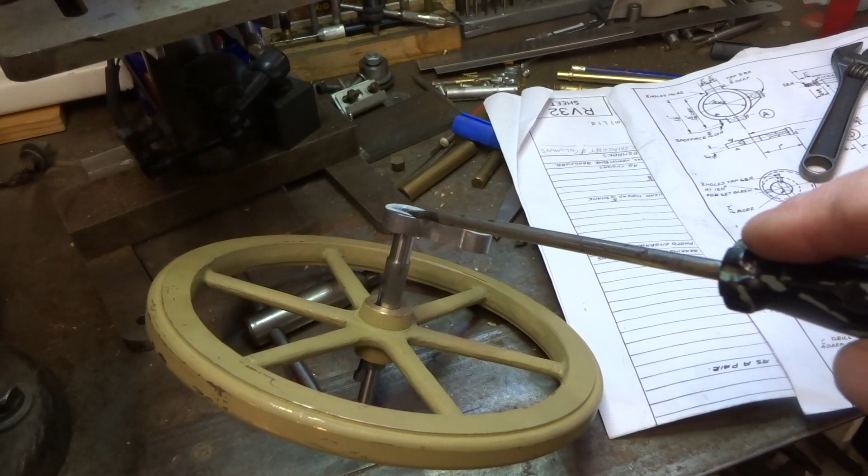The drawing calls for this part of this crank arm on the main crankshaft to be thinner than the area in the boss. Several ways you could have done it. I could have made the bore at this end larger and then fitted an insert in to create that effect, and actually made this out of thinner metal, but I didn't do that. So the task I'm now faced with is to reduce the thickness of this end to something like what the drawing calls for.

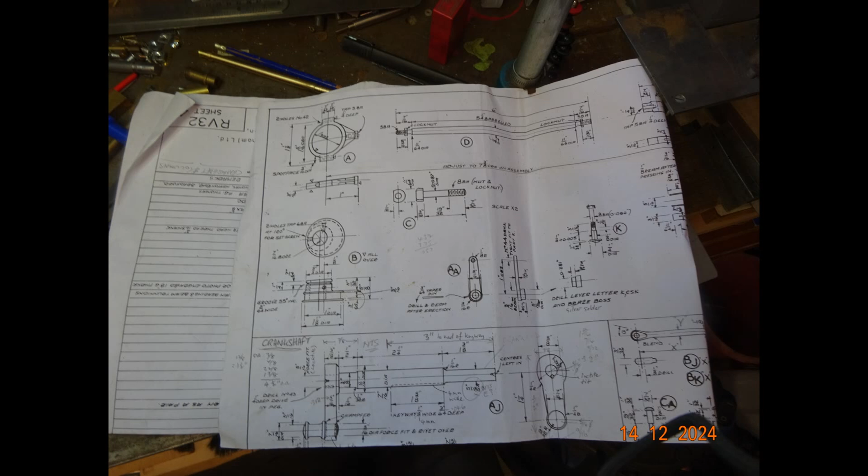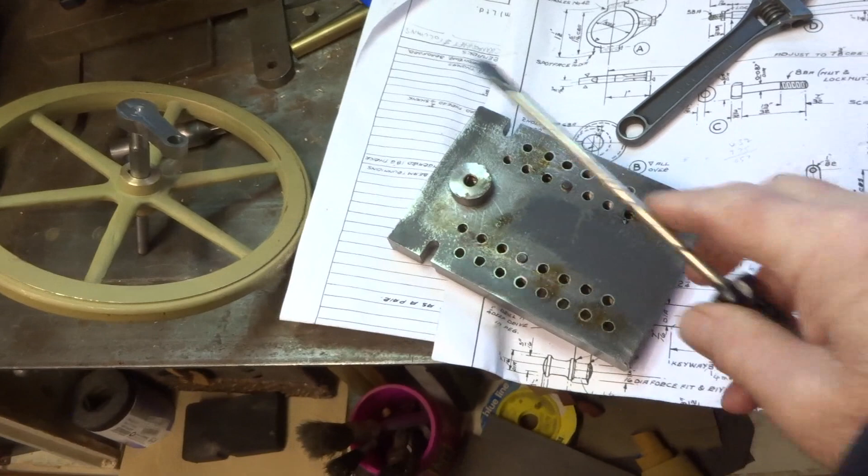Years ago I made this, I suppose a fixture plate or something, which fits on the rotary table in the middle. There's the boss, and what you do, if you can get it set up, is to centre whatever you're working on in the middle here, clamp it down by whatever means, and then you can rotate it on the rotary table to machine whatever it is you think you're doing.

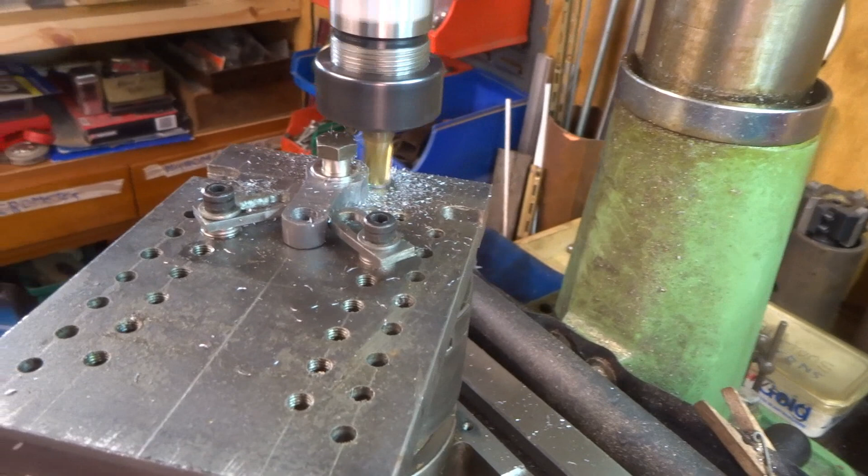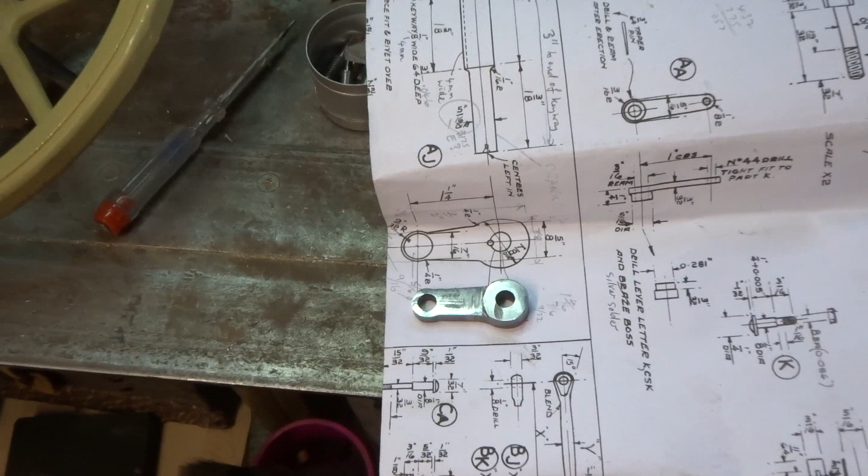Slightly speeded up piece of video showing this rotary table machining the end of the crank arm to make it look more round. My filing skills are not great. Nowhere near medal winning, but it'll have to do. I've got fed up trying to machine this, so as far as I'm concerned, that's it.

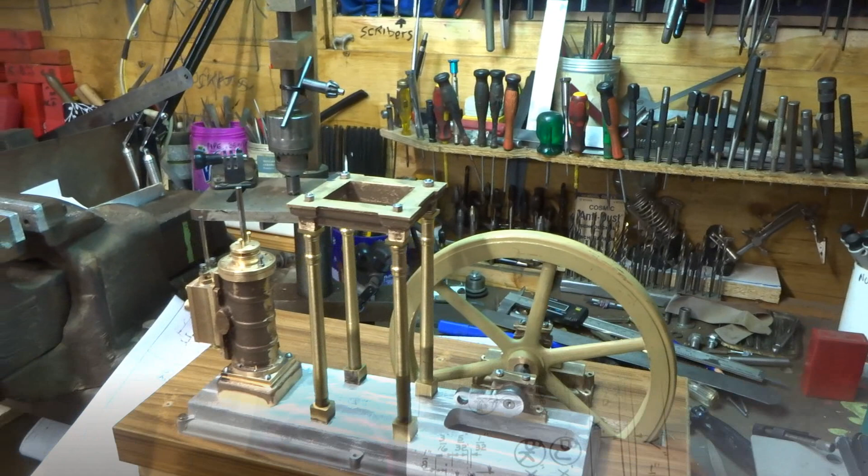Just a mock-up. I've machined the two bearings, and I'm pleased to say things seem to turn around okay. I haven't bolted the bearings down yet because I'm not too sure exactly where they're going to go. Probably the next thing is to do the beam and make the connecting rod or whatever it's called before I settle on precisely where I'm going to drill that lot down. But yeah, I'm happy with that. Very good.

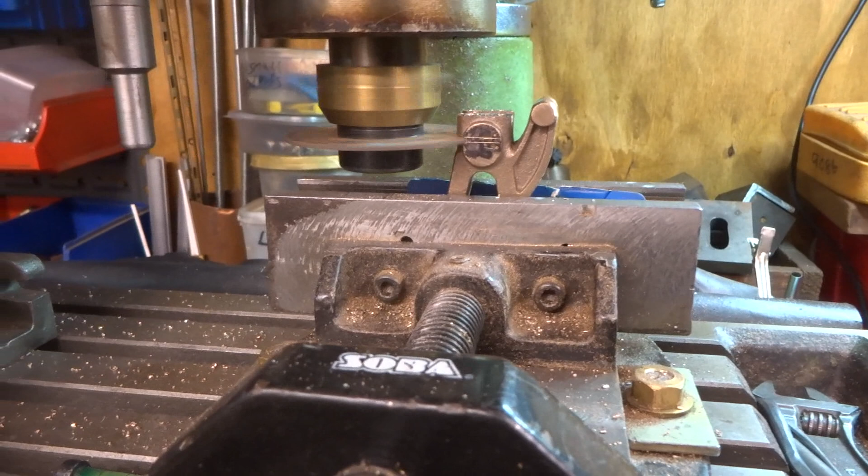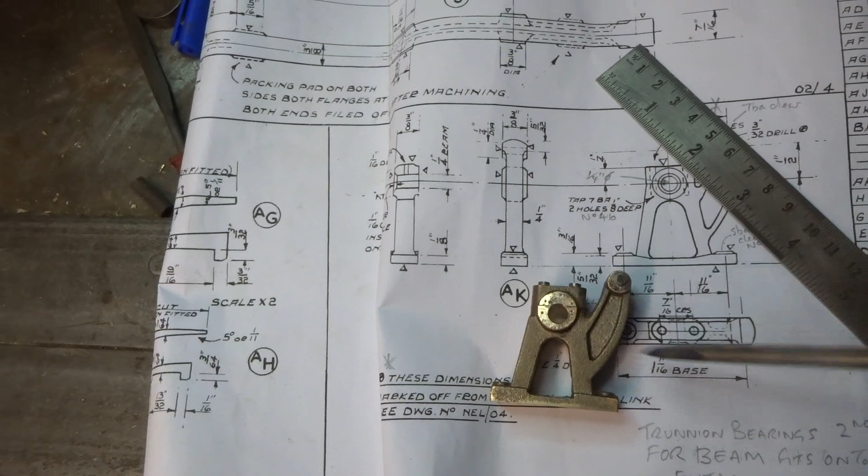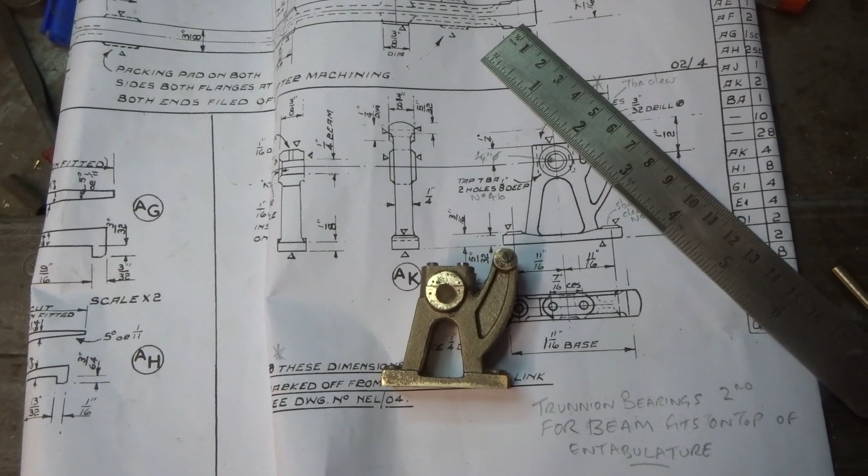This is the start of a ginormous mistake. This, I think, is the trunnion bearing in which the beam of this beam engine kind of rocks. And I have made a colossal mistake. I was tempted not to own up, say nothing, either scrap the part or I don't know, but my conscience has overcome me and I'm going to own up to what I've done wrong.

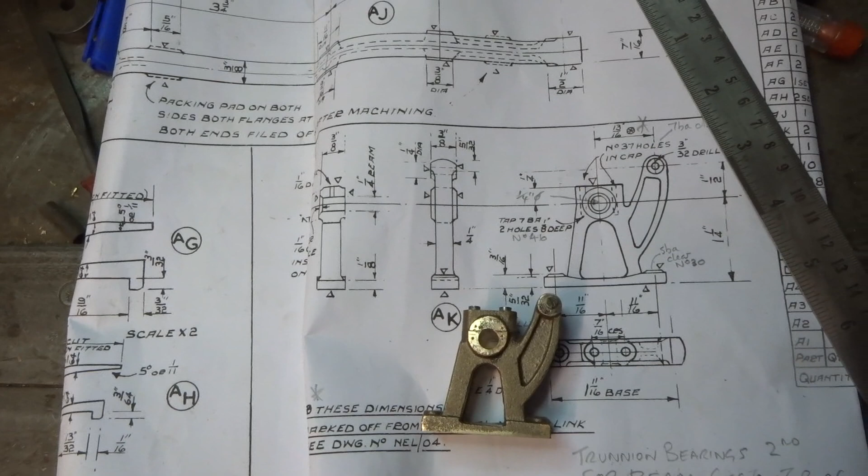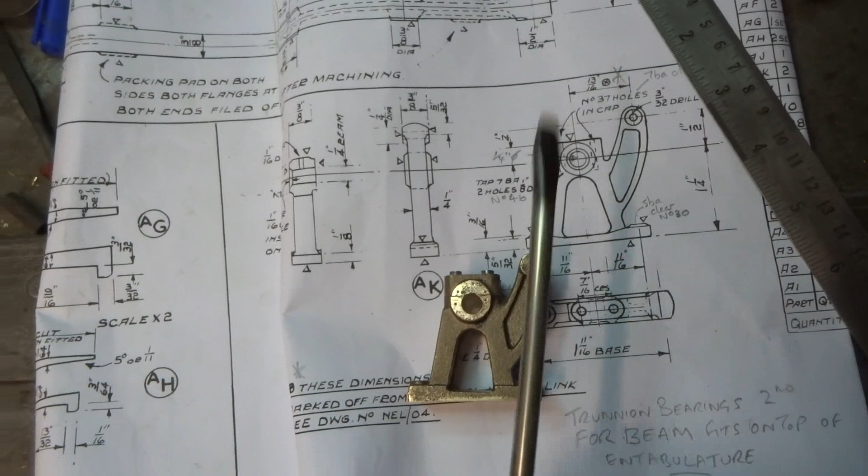This hole is in the wrong place, this bearing is in the wrong place. The distance between this pivot point here and the centre of the pivot for the rocking beam is supposed to be, by this drawing, 1/2 inch. But actually, I don't know how it's happened, it's more like 9/16 of an inch. So if I were to unscrew this, the cut line isn't on the centre of this bearing and you would never fit the shaft. So in essence, this hole needs to move in that direction, use the finger, by approximately 1/16 of an inch, dimension to be checked.

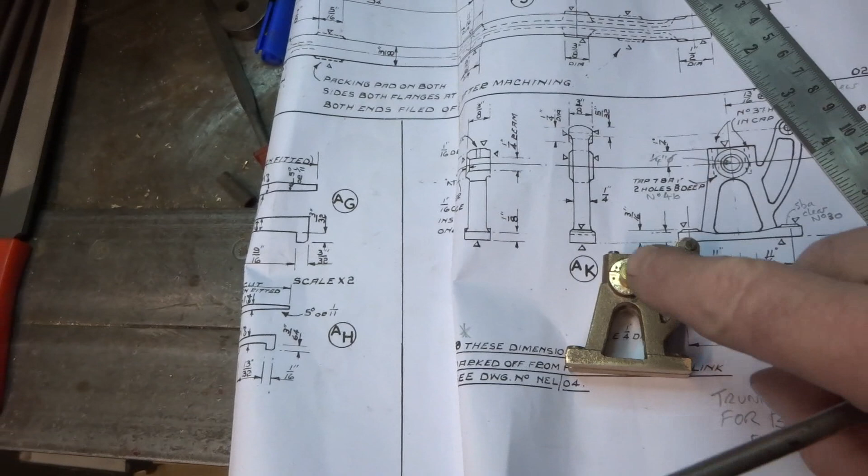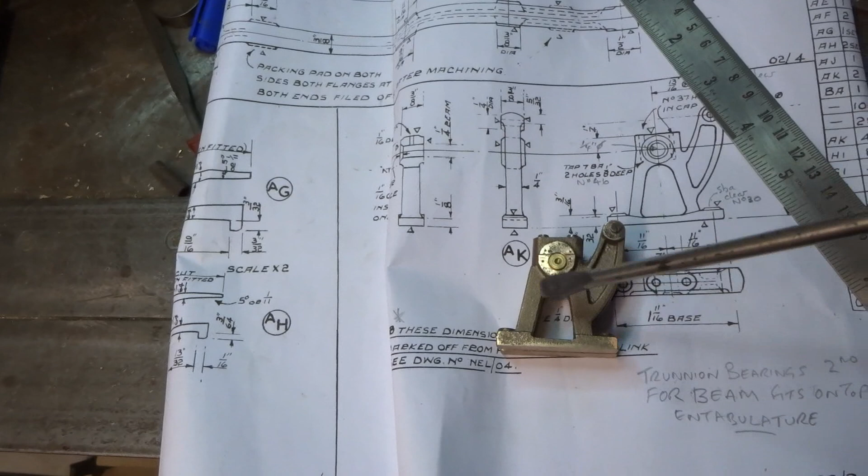I've turned a piece of brass to a fairly reasonable sliding fit in the incorrectly positioned hole, and the plan, if it is a plan, is to tin that piece of brass, solder it into this part, and then re-drill, re-ream this hole in the correct position, which, as I said, is going to be about 1/16 of an inch or so in that direction, to be checked. This is what I'm on about. It's supposed to be 1/2 inch from there to the centre line of that pivot, and isn't.

So I spent a few minutes wondering where in the new workshop I've put all my solder, and surprise, surprise, it's staggering really. It's in a cupboard that says soldering. Blooming heck.

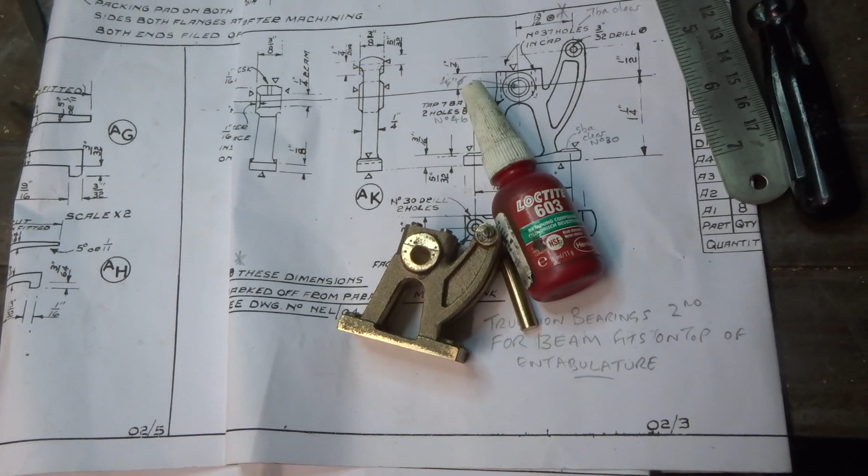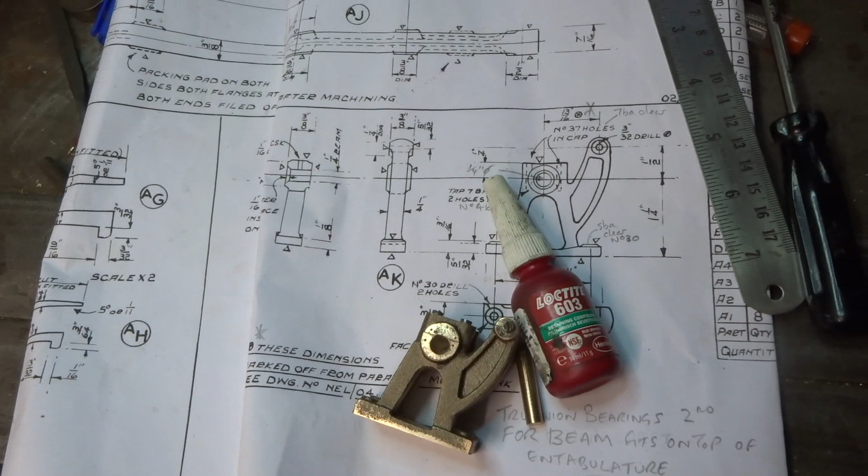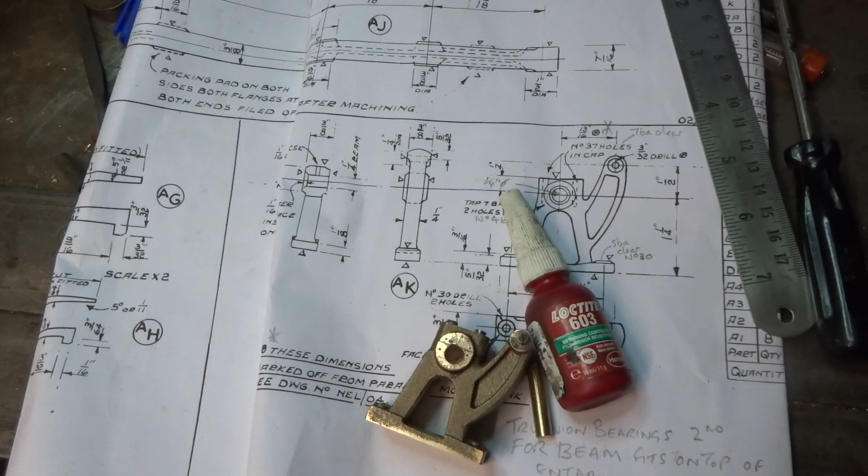Now I've had a further thought, and I can't tell whether it's a good thought or a bad thought, but soft solder is not the strongest material on the planet. The piece of brass which I intend to plug this hole with has been turned down so that it's a fairly reasonable sliding fit, i.e. it's got a little bit of clearance for what I thought was going to be solder, but I'm wondering whether to use Loctite retaining compound to fit this into that. I mean, this parting surface is not going to get hot, so there's no fear of overheating the Loctite, I don't think.

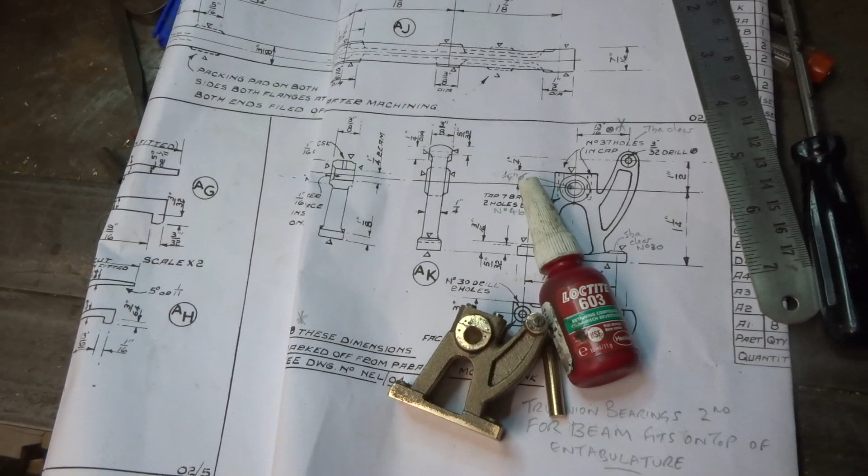And I suppose the reality is, if I use the Loctite, it avoids heating this whole assembly up, which I didn't really want to do. And if it doesn't work, I still have the option of either scrapping the lot or cleaning it up and reverting to the original soldering plan. So I'm going to try the Loctite approach.

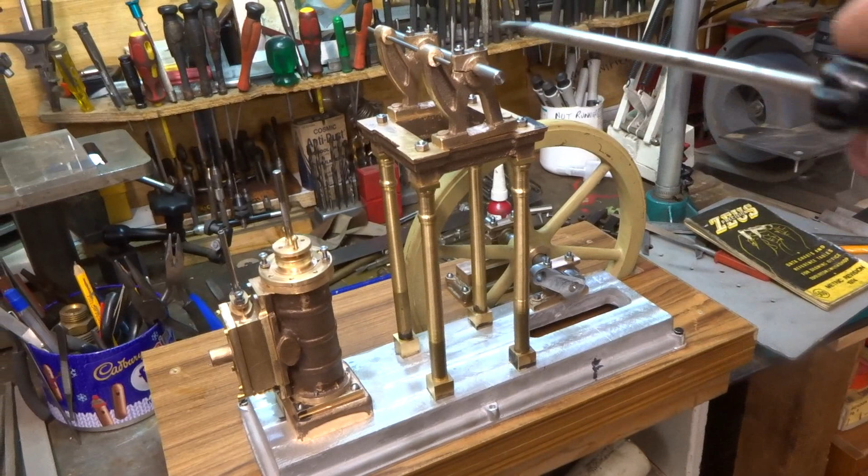Right, I've corrected the drillings through these two trunnion bearings as described, and the Loctite idea worked, I'm pleased to say, so I didn't have to do any heating up and soldering. That seems to have worked quite well. And this is another mock-up with, I think, the beam trunnion, and I think this bit's something to do with valve gear. I'm not quite sure, I haven't looked at the drawing yet. Anyway, everything's just placed there, nothing much bolted down, and it all seems to work.

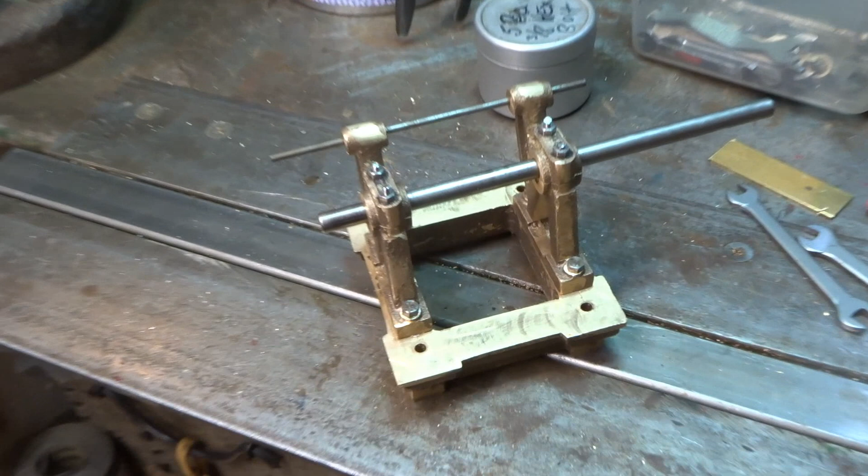Philosophically speaking, I suppose the message is that when you make a mess like I did with these drillings, instead of just throwing the part away, which is very tempting, the challenge is how you overcome the problem that you've created, and it's really all about that. Happens to me in the workshop all the time. Never mind.

The trunnion bearings are fixed to the entablature, and by eye really, but as best I can judge, everything is parallel to everything that it ought to be, hopefully. So everything, once it's on the beam engine, should be a-okay, I hope. Time will tell.

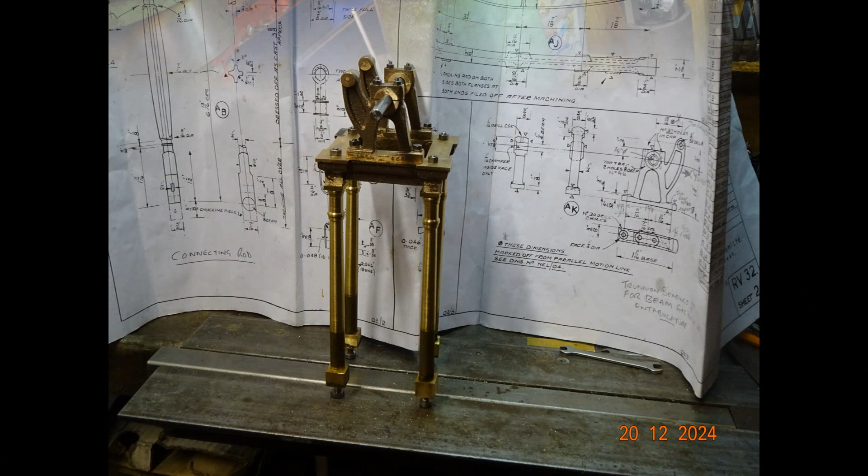The beam and its pivot are done, and seems to look correct. I have to make oilers for the various bearings, but there's a few of those around this engine, including down here, so I'll make some oil cups when I'm in a good mood, because they take quite a long time. But anyway, yeah, seems alright as far as I can judge.

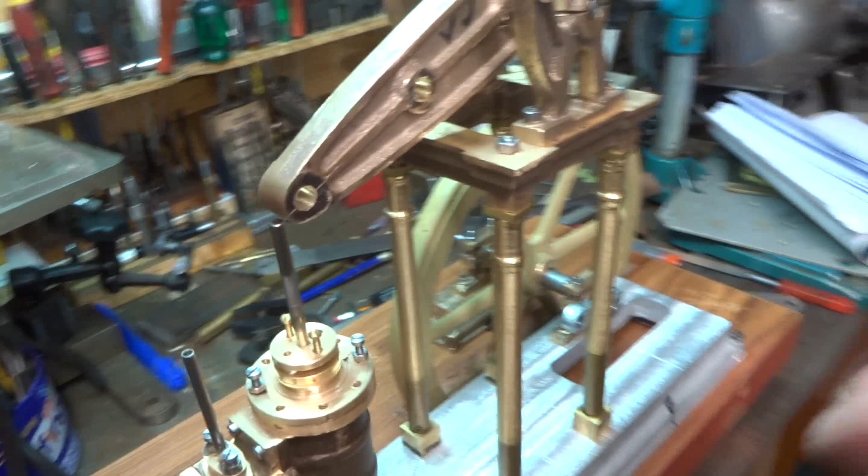And it sort of lines up at the end to where the piston's going to be, which will connect to all the valve linkage, of course, the parallel motion gear. But we're kind of there. So yeah, at this juncture I'm relatively happy, I suppose.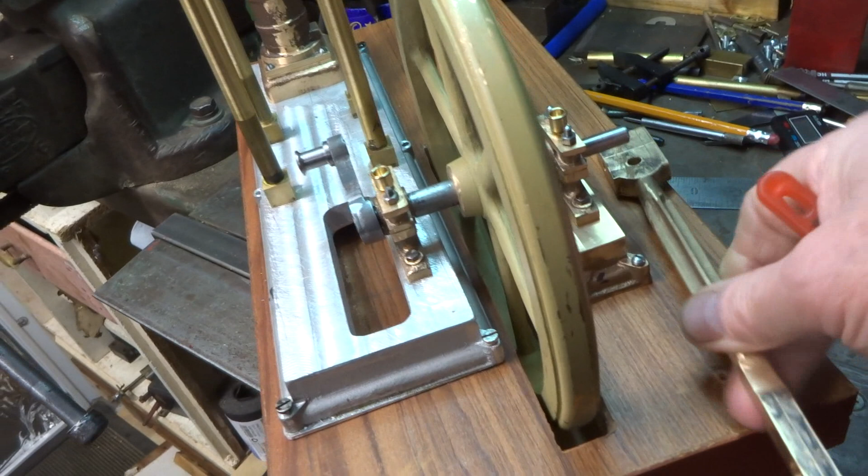I've made some oil cups for some of the bearings, and the next job is to try and make the connecting rod, or whatever it's called. I've drilled, hopefully in the right place, who knows, some of the primary holes that seem to be on the drawing, and I guess the next step is to sort of form the profiles. I'll have to take a look at the drawing.

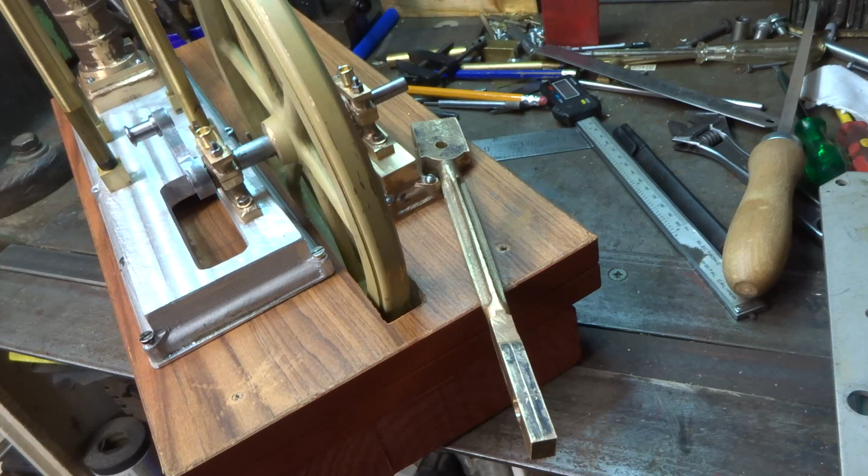The drawing calls for a bit of cosmetic turning at each end of the connecting rod. Not the sort of thing I like doing, and quite a faff to do, but I suppose I'd better have a go.

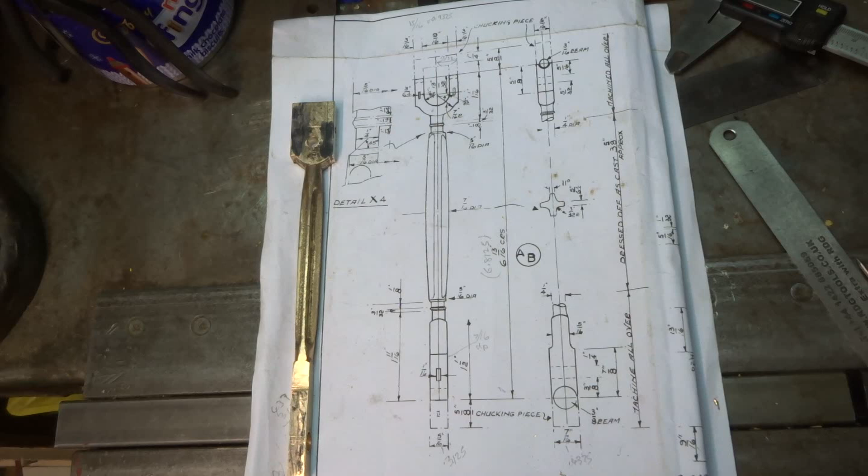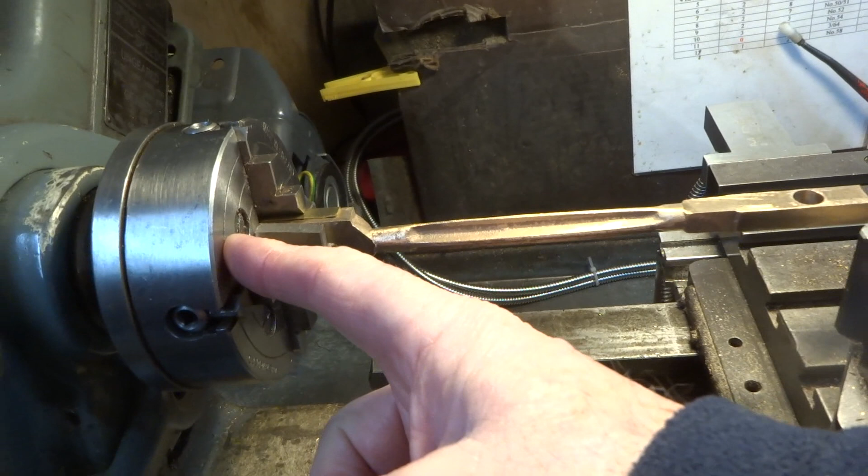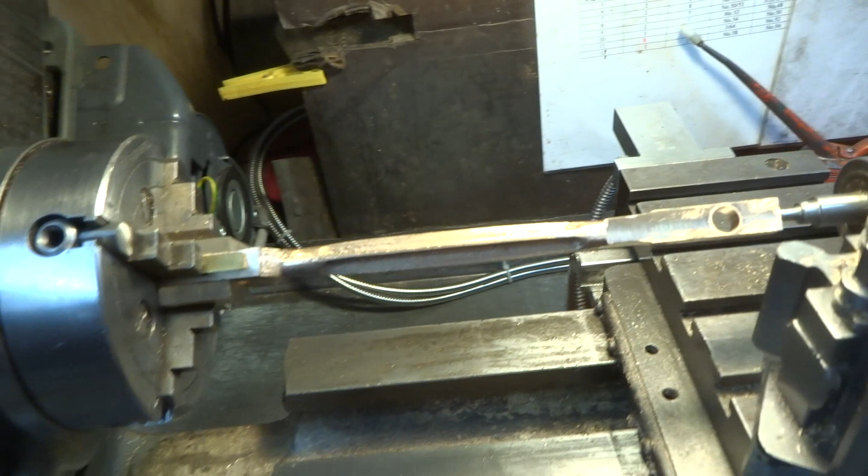I've centre popped each end of the connecting rod, put a dead centre in the headstock to then centre on the pop that I've put at this end, and I've got a rotating centre at the tailstock, and then fairly lightly gripped this end of the connecting rod in a 4-jaw to provide some grip to turn the flipping thing, in an effort to profile these two parts to look something like what the drawing says.

I think that's all I can be bothered with. Bit of turning at each end, just cosmetic, no real measurements. Only one incident with things flying out the 4-jaw chuck, but we don't talk about that. Pretend it never happened.

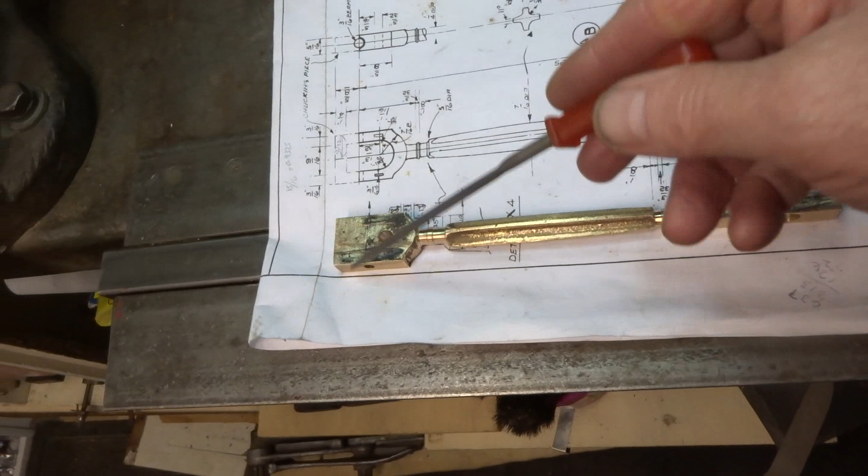So if I've understood things correctly, I have to now remove the chucking pieces at each end of this rod in order to finalise and profile the relevant parts. I think I'm going to do that by just hacksawing off the redundant pieces. I mean, I could do it other ways, but just hacksaw seems as easy as any. As long as I leave a bit of metal to clean up, it'll be fine, I hope.

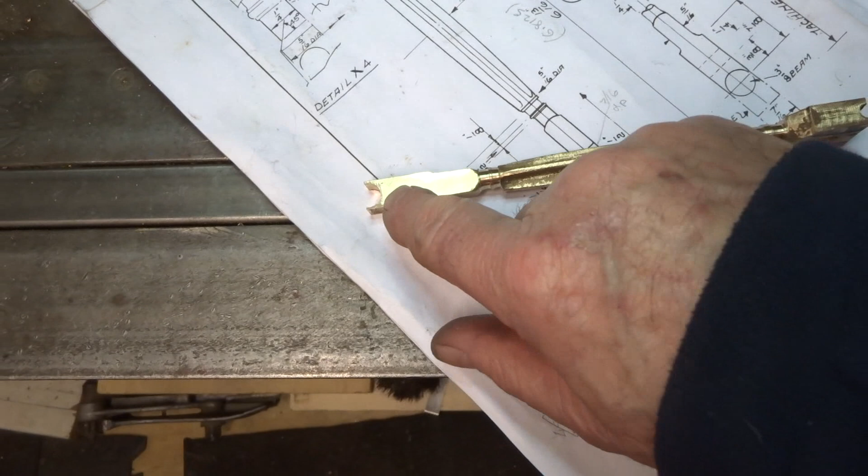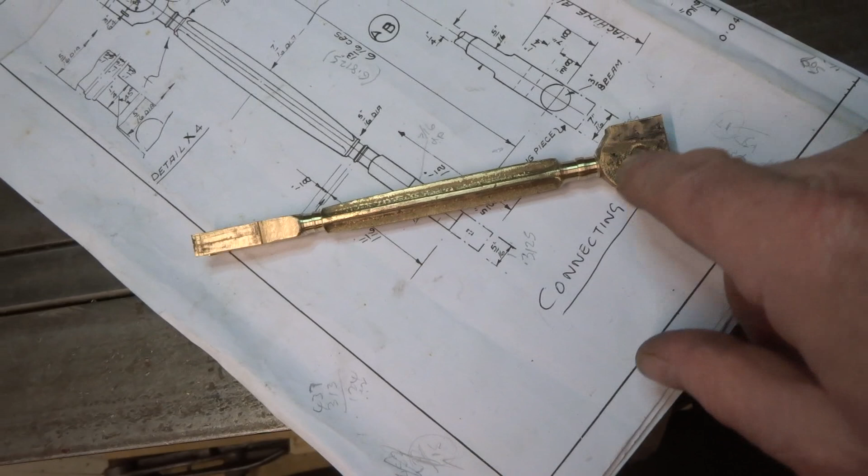Dimensions aren't finished at each end, but getting there, I hope. I mean, these slots should be exactly to half of the diameter of whatever that hole is for, and ditto here should be exactly half the diameter of what was the hole. So they're a little bit oversized at the moment, a little bit more to come off. But I'm not going to do that until I'm more certain of where I'm going. Next step is to cut out along here to make the kind of U shape, which is this bit here.

These are the top end bearing shells, still to be unsoldered because they're in two halves, but turned to finish size and reamed 3/16 in the middle there, which is what the drawing calls for. So let us hope it's all correct.

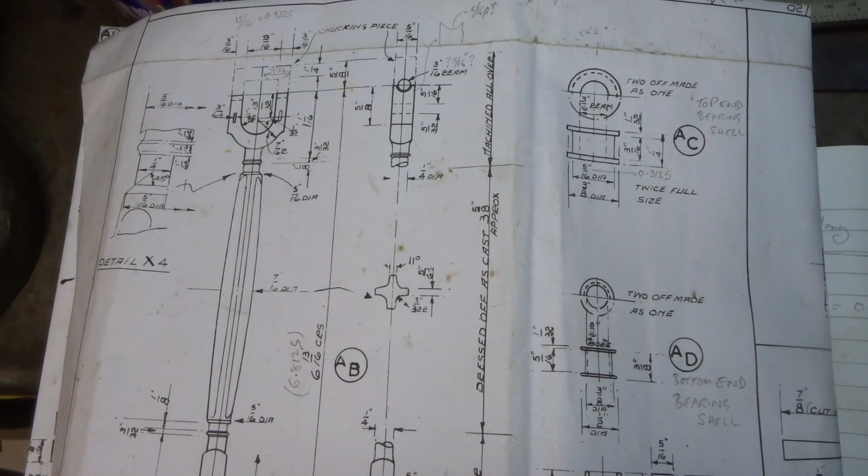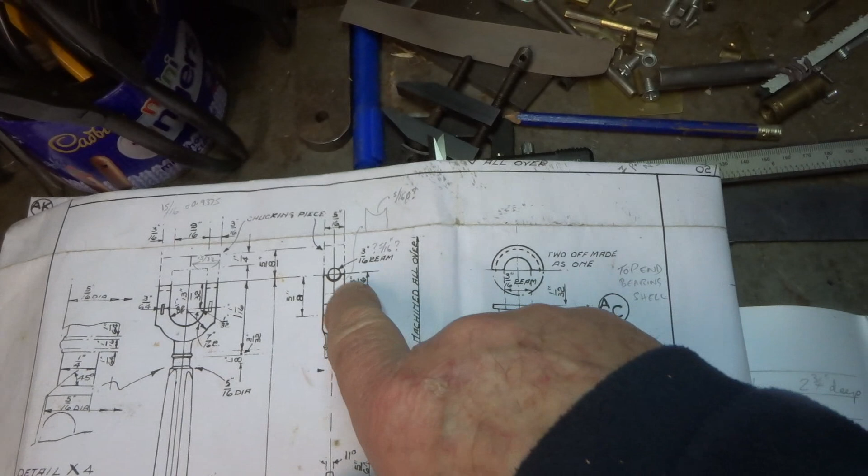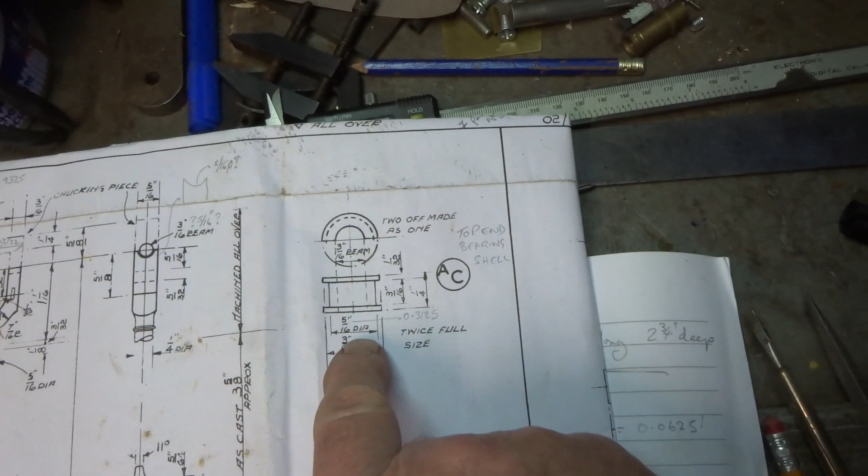I think I mentioned this before. In my view, there is an error on this drawing. The top of the fork, which is the sort of connecting rod, and I've machined all this up, shows a U-shaped machining 3/16 in diameter, but the bearing cap, which is supposed to fit in that, in my judgment, actually has a diameter of 5/16. The 3/16 refers to the bore of the bearing, not its outside diameter, if you follow me.

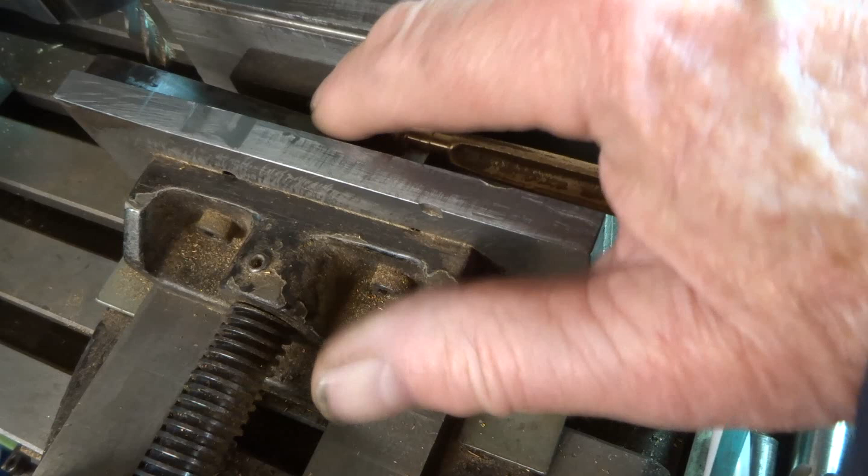So the U-shaped slot that I'd carefully machined into this has got to be increased from 3/16 to 5/16. So I've put a 5/16 cutter in a collet in the mill, and the plan is to run that up and open this 3/16 kind of U-shaped affair to 5/16. But of course, if I'm to maintain the centre line of this fairly accurately, which it should be really, the 5/16 cutter needs to machine into this U a little deeper.

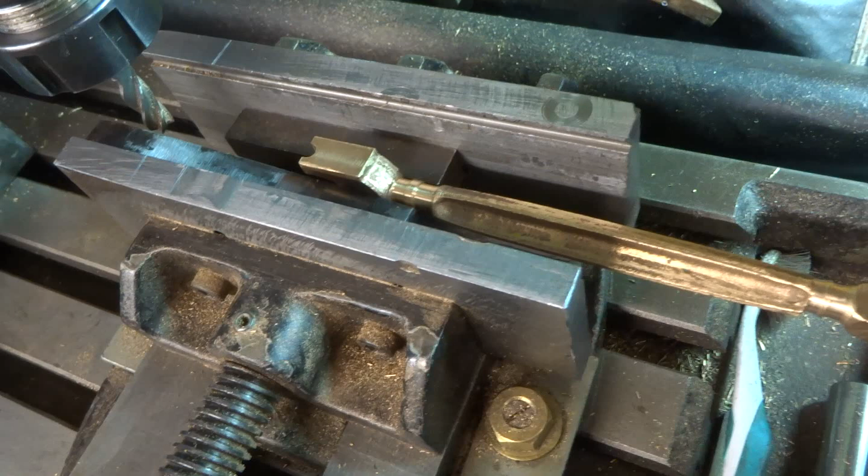Now the difference between 5/16 and 3/16 is 0.125, an eighth of an inch, and if you halve that you get to 0.0625, and in my judgment, when I get to the bottom of this U here, the travel needs to be moved along by 0.0625, which should then bring the centre line of the 5/16 U to the same centre line which was carefully marked out as the original and incorrect 3/16 hole. So that's what I'm going to do.

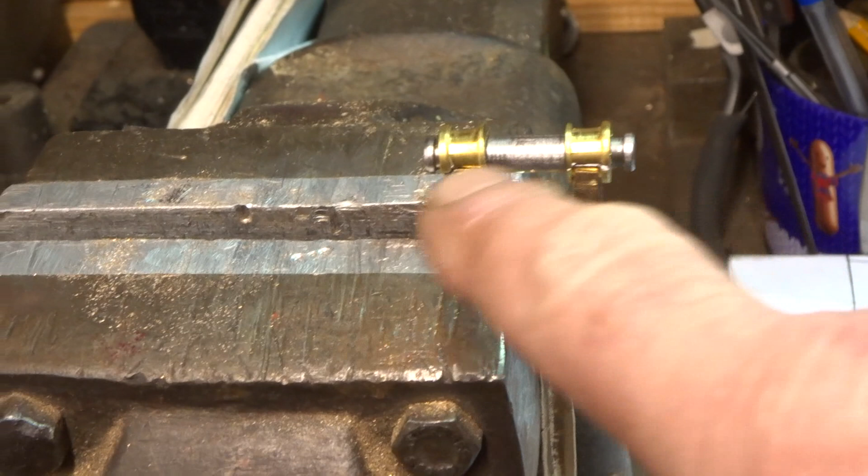Well, does that look right? Who knows? Let's hope so. Well, not brilliant. Might need to remake these bearings because there's a bit too much of an overhang this side. Cosmetically, I don't think it makes any difference, but at least I've got the bones of the dimensions sorted out, and the bearing caps work. I'll see if I get enthusiastic to remake this.

I haven't made the retaining straps yet, of course, but that's how it's supposed to go with the split bearings each side. The shaft itself is a light press fit in the beam, and the shaft is not intended to and doesn't rotate because it's pressed in. The two end shells are the bearings.

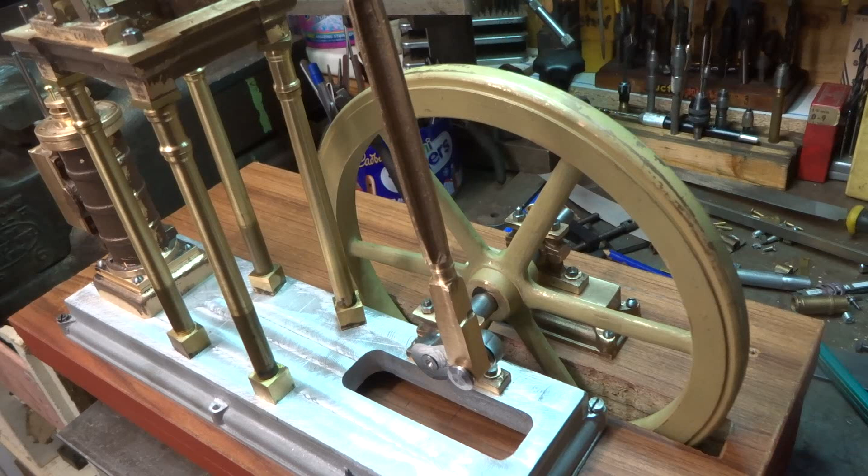Of course, the whole kerfuffle of split bearing caps and straps and whatnot has got to be repeated at the bottom end. I think I'll save that for another day. It won't win any prizes, but I think it'll work.